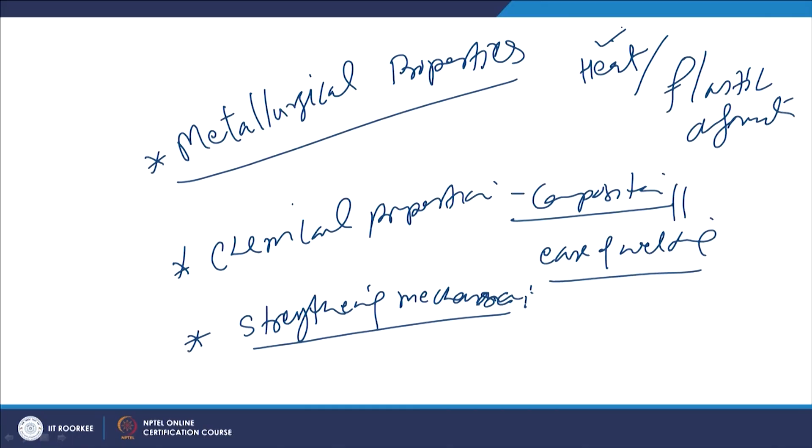Another important aspect affecting the weldability of metal is the strengthening mechanism. Each metal system is designed using a particular kind of mechanism. So, what are the various mechanisms used for developing the required strength in a metal system, and when the metal system is strengthened by a particular mechanism, how does it behave when subjected to welding, either through the fusion based approach or through the plastic deformation based approach.

Mechanisms like solid solution strengthening, work hardening or strain hardening, grain refinement, transformation hardening, precipitation hardening, and dispersion hardening. These are the most commonly used underlying mechanisms for strengthening metal systems, and the response of these mechanisms to the heat or deformation of welding is different, which in turn affects the ease of welding of the metal.

Then the mechanical properties of the material which is being welded. This is another aspect, like metallurgical properties, the mechanical properties of the metal which is to be welded. These properties also play a big role, especially in the case of solid state joining, where plastic deformation plays a key role. Like if the metal has a yield strength of 200 MPa and, say, 40% elongation,

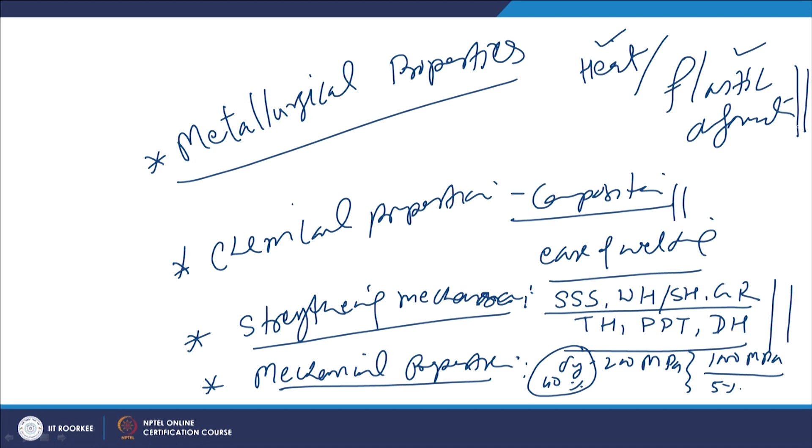this material will behave completely differently compared to another metal system offering a yield strength of 1000 MPa and ductility of just 5% elongation, because these two mechanical properties will significantly govern the flow stresses or flow behavior of the material, which in turn affects the plastic deformation tendency, and that will affect the ease of welding using the deformation based approach, where either micro level or macro level plastic

deformation is used. Certainly, the weldability of the metal by the fusion based welding process is not influenced by the mechanical properties. So, the approach being used for welding will significantly determine the extent to which these properties of the materials affect the ease of welding.

Now, we will be talking about these characteristics one by one. The first one is the metallurgical properties. With regard to the metallurgical properties, if we take one metal system A, what happens to it when it is subjected to either fusion through the application of heat from an external source or controlled plastic deformation altogether depends upon the kind of metal system and the strengthening mechanism which has been used for the design of a given metal system.

So, if the fusion based approach is being used, then it will be leading to the cast dendritic structure, and it will not have any effect of any other strengthening mechanism which was used for developing the required strength in a given metal system. But apart from that, there will also be a formation of the heat affected zone due to the dissipation of heat from the weld pool. So, heat affected zone formation. So, these are the two integral parts of any fusion welding process, where one weld metal will be formed and one heat affected zone will be formed.

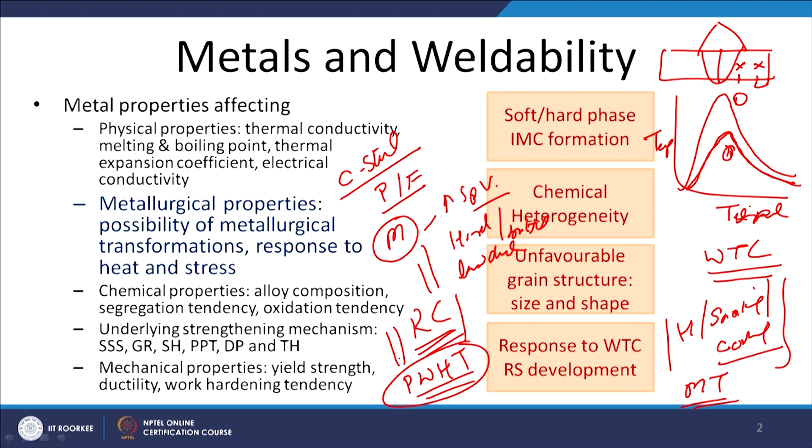Now, we will see the next property of the material: chemical composition, which considers the alloy composition. The composition of a metal which is to be welded certainly plays a very big role in determining the weldability.

Metal can be pure or it can be of the eutectic composition or other composition. So, we know that the pure metals and the eutectic alloys of the eutectic composition will be melting and solidifying at a constant temperature, at a single temperature. So, this is a very good side, where the solidification starts and ends at one temperature.

So, when the pure metal or an alloy of the eutectic composition is welded, due to the melting and the solidification at one temperature, this leads to the development of the minimum welding defect related tendency, and that is why they offer a good weldability as compared to the alloys where the solidification takes place over a range of temperature.

So, in the alloys offering a solidification temperature range, or you can say a wider solidification temperature range, there will be increased tendency for the solidification cracking, there will be increased tendency for the liquation cracking, and there will be increased tendency for segregation of the alloys or chemical heterogeneity.

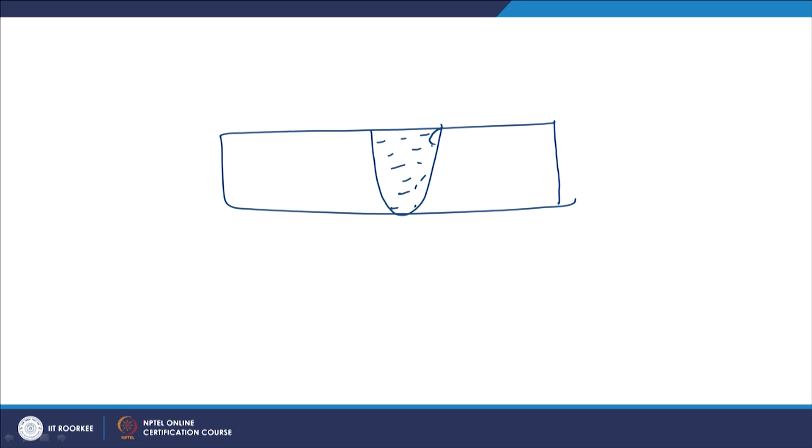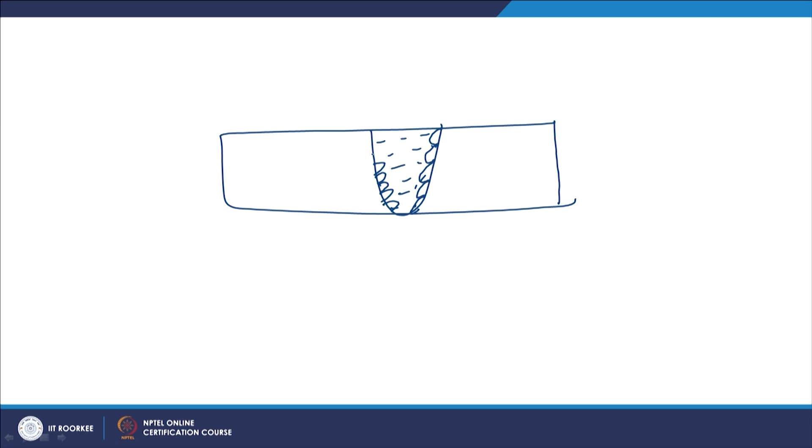And its effect we can directly observe in case of the solidification cracking tendency during the welding. So, in that case, say this is the weld metal. The solidification begins at the fusion boundary and it progresses towards the center line of the weld like this. So, obviously the things which solidify first are in pure form, and in case of the alloys having the wider solidification range, the excess alloying elements are ejected in the liquid metal.

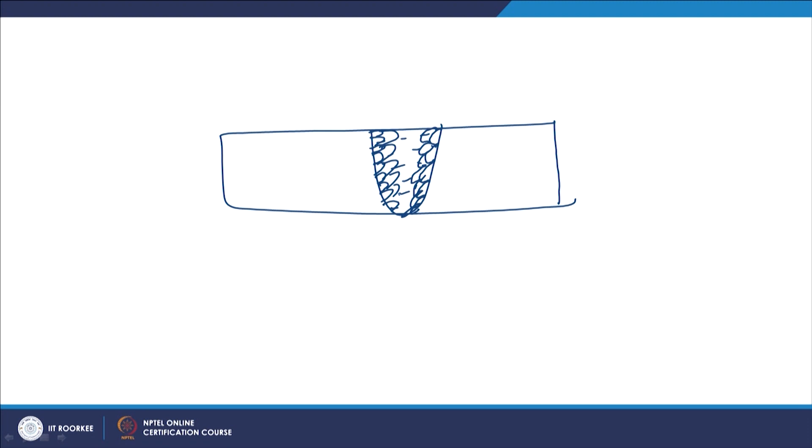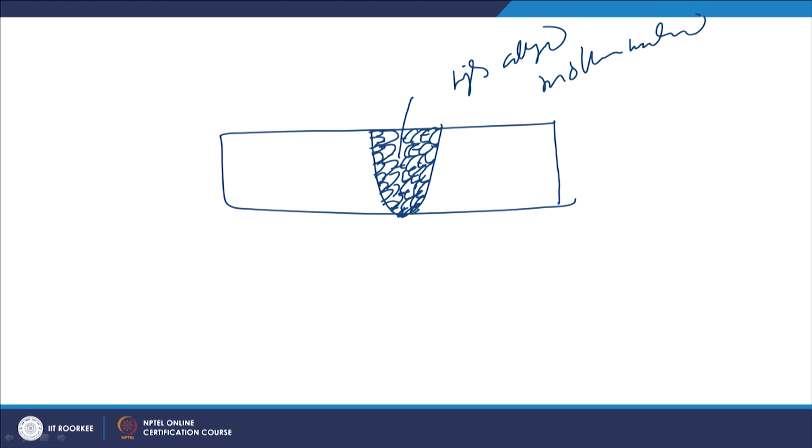So, as the solidification progresses from the fusion boundary towards the weld center, we will notice that the alloying element concentration will keep on changing, and alloying elements will be enriching, especially in the left out liquid metal, and at the end we get the high alloyed molten metal. And we know that the pure metals have a higher solidification temperature as compared to molten metal having a higher concentration of the alloying elements.

So, that is what we can see simply from any phase diagram. Pure metals will be solidifying at a higher temperature, then our liquidus will be decreasing with the addition of the alloying elements. So, the same concept is applicable here also, where with the enrichment of the alloying elements in the liquid metal, their solidification temperature will keep on coming down.

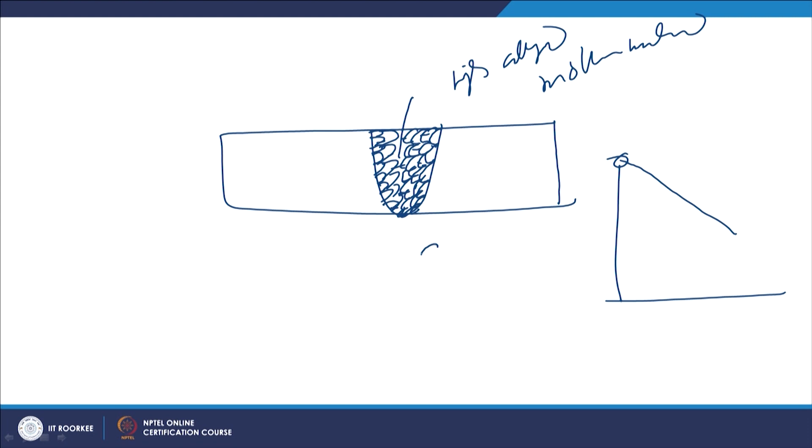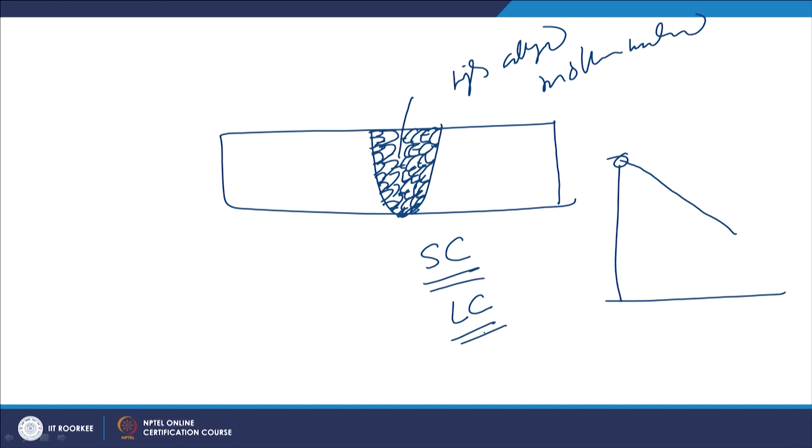So, this in turn subsequently leads to the development of the solidification crack, and this is happening primarily due to the presence of excess alloying elements at the weld center line, and the same is the reason for the liquefaction cracking, where a lot of chemical heterogeneity existing at the grain boundaries leads to wider solidification temperature ranges, even in the heat affected zone, increasing the liquefaction cracking.

Chemical heterogeneity also promotes the corrosion tendency. Like I gave one example where either the enrichment of the alloying elements at the weld center is taking place, or in the heat affected zone some unfavorable metallurgical transformation is taking place, where the phases which are being formed are enriched with a particular kind of alloying element, and nearby we are having the deficiency of that particular element. So, such kind of chemical heterogeneity will be promoting the galvanic corrosion.

Somewhere it is deficient and somewhere it is enriched. So, like in case of the austenitic stainless steel, chromium carbide is found. These particles have higher chromium as compared to the other areas where chromium is absent or it is in reduced quantity. So, wherever chromium is less, in case of the austenitic stainless steel, this will be acting as an anode and these particles will be acting as a cathode.

So, the chromium deficient areas will be experiencing the loss of metal in the favorable corrosive environment, and that will be promoting the corrosion of the weld joint, especially in the heat affected zone. And the primary reason behind this is the chemical heterogeneity, which is being promoted due to the metallurgical transformation.

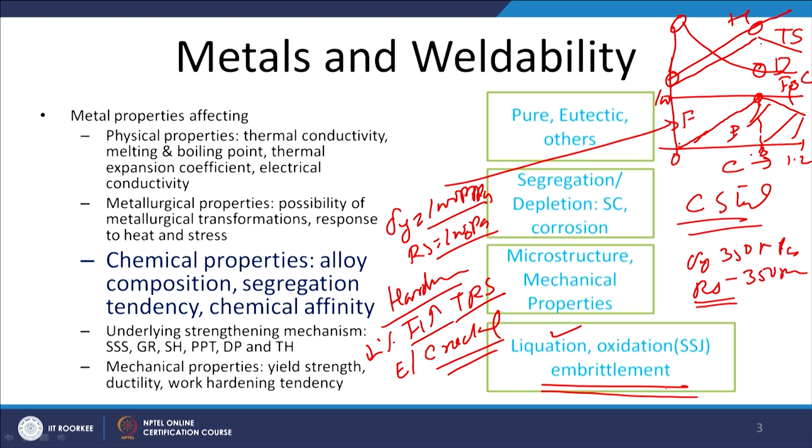So, like I have explained, if greater chemical heterogeneity exists, then it will lead to liquation cracking and solidification cracking tendency. And similarly, in case of steels, the carbon content and the alloying elements directly affect the carbon equivalent, which in turn affects the hardenability of the steel, and increased hardenability will affect the embrittlement, or the low ductility, low toughness tendency of the weld joint.

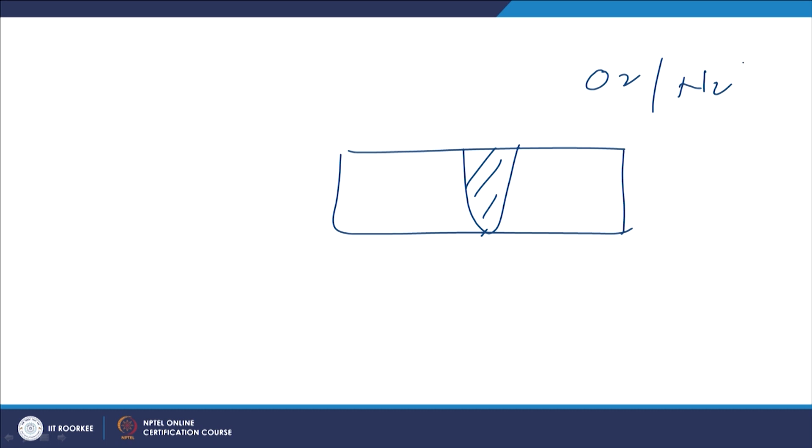Chemical affinity is another important aspect that I will explain a little bit. If there is a metal system which is subjected to external heat for fusion, at high temperature there will be environmental gases like oxygen, nitrogen and hydrogen. So, the affinity of the metal to these gases present all around during welding can lead to the formation of oxides or nitrides of that metal, and these oxides and nitrides may be refractory in nature. These may be hard and brittle, and may interfere with the fusion of the metal. So, these will make the welding difficult.

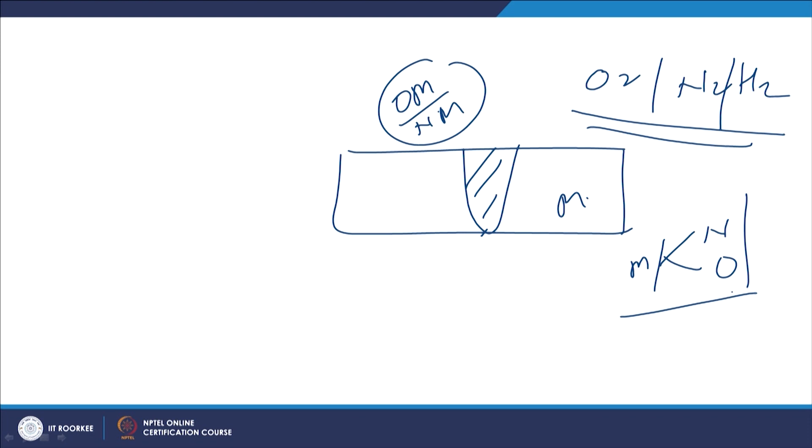At the same time, these oxides and nitrides of the metal in general are hard and brittle. So, these act as inclusions if left in the weld joint, and these inclusions promote the nucleation of cracks in the weld metal under external tensile loading, and thereby reduce the performance of the weld joint.

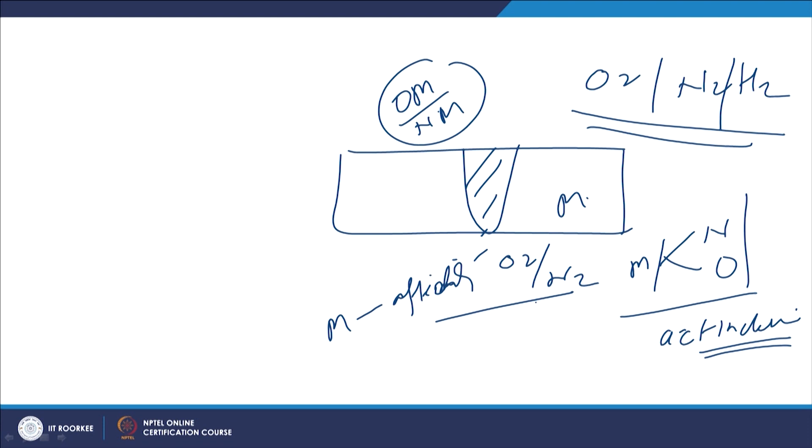So, if the metal has greater chemical affinity to oxygen and nitrogen, then we need much better protection, a more effective process which can protect the weld metal from these gases to get a sound weld joint, and for that we need to put in extra effort, and that in turn will reduce the weldability of the metal. So, metals having greater affinity to the environmental gases will have reduced weldability.

Now, I will summarize this presentation. In this presentation, I have talked about the ways by which the metallurgical and chemical properties of the weld metal can affect the ease of welding, or the weldability of metals.